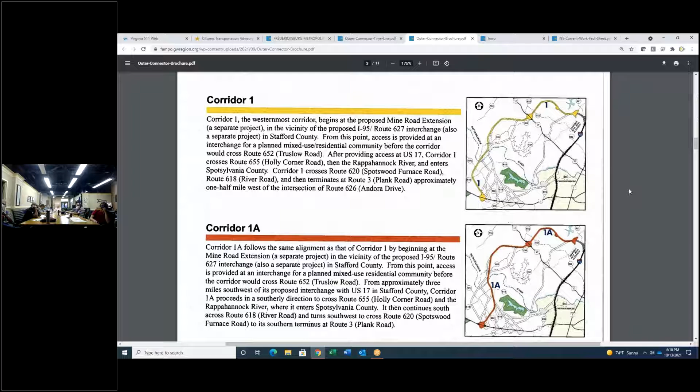Essentially, you can see the typical section would be a 4-lane divided road with a raised median. A number of options were looked at, most very simple. Corridor 1, the first corridor we looked at—you see the Centerport interchange. This location here is Holly Corner Road, so we could cross Route 17 in Stafford somewhere near Holly Corner, come down across the Rappahannock River, swing out near the Battlefield Park, and tie in on Route 3 west of Lick Run. So that was number one.

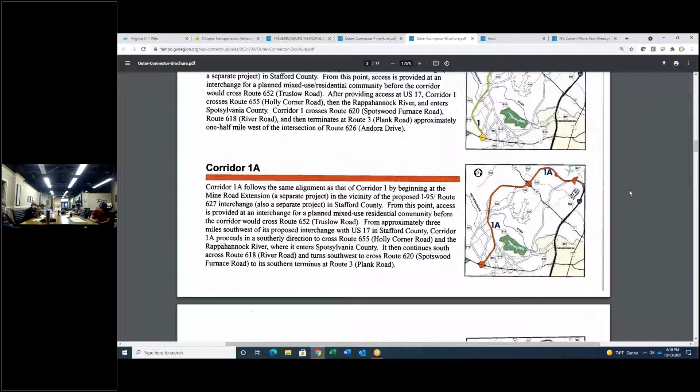You can see number 1A was exactly the same up to here, with a variation down in the Spotsylvania County area. It was mostly to move further away from the park. As you roll on through the next one, you'll see it looks just like it—it's just a variation, 1B. It looks somewhere in between; it came back and tied in with the first one, kind of avoided. So you just kept seeing more and more alternatives introduced in this area.

You can see it looks like an octopus here. And then the same thing here, although this one actually took a little diversion up in Stafford and went south to Holly Corners to the north. But most of these were a combination of beginning at Stafford, crossing 17 west of where the Walmart is now, and tying in somewhere on Route 3 west of Andora Drive. And so on we go.

Something different, right? Corridor 3 was much closer in, and there's been some scuttlebutt around about this particular option or variation of it here recently, I've heard. This one, rather than going out to Berea, would have tied in somewhere in the neighborhood of where Celebrate Virginia Parkway starts now.

There was no Celebrate Virginia Parkway when we were talking about this, right? It hadn't been built yet. It would have crossed somewhere in that area, then come down across the Rappahannock, just east of Mott's Reservoir, avoiding the Rocky Pen Run Reservoir, which hadn't been built yet either, to the east instead of the west. You can see that's this area and this area. It would tie back in somewhere west of Harrison Road.

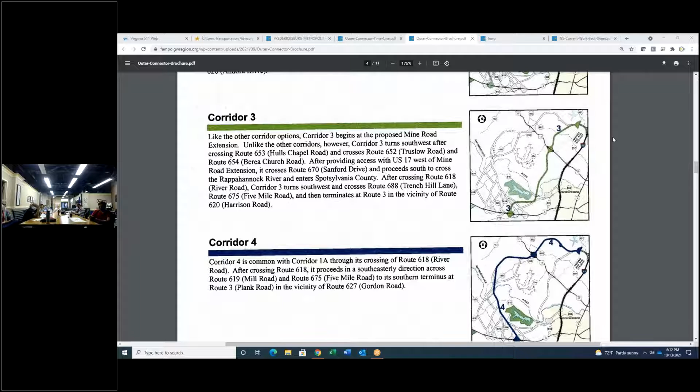So that one was a true alternative to the other, not just some variation. Then you have Corridor 4. We're back up doing the same thing again, but because Corridor 4 meant a whole different set here, we said, okay, here's our baseline now, Corridor 4 rather than Corridor 1. But again, very similar to Corridor 1.

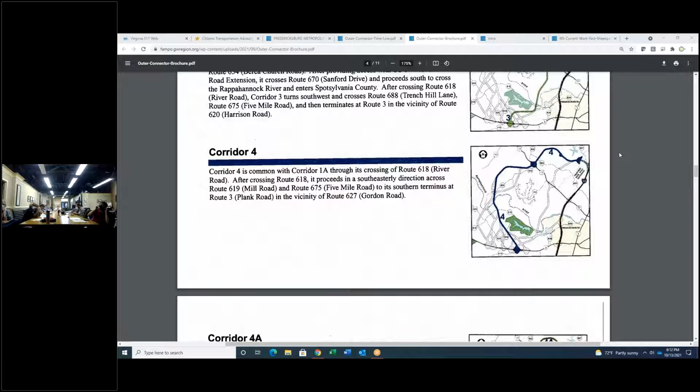4A, more the same, right? 4B, well, it doesn't look all that different, but you can see there's so much debate about things. There's your residential areas. Again, you have the Battlefield Park. You had the logic of where you wanted to tie in Route 3 to get the most use, and so forth.

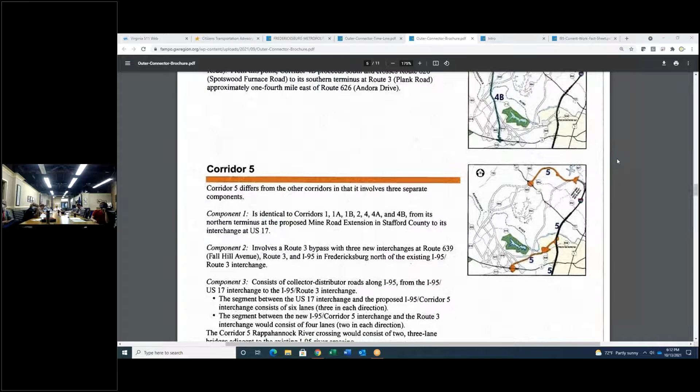Then we finally get to Corridor 5. This is a statement I made earlier about how we just saw part of the Outer Connector open because of this. This one had three components. It had this segment up here that picked up its Center interchange and went over to the Berea area on 17. And that was it. Basically, this was your 17 bypass.

That became something else further along, we'll talk about in a few minutes. But the third component, not so obvious here, was just improvements along 95, a collector distributor system. You can see that's what we built out here just recently on the southbound river crossing, and in the next two years we'll see the same thing on the northbound side. That's the section.

Essentially what we're seeing built out there is a portion of Outer Connector Corridor 5 right now. And of course the idea with this was for anyone who simply objected to a new location. There's a lot of reasons to object to new locations, right, Mr. Paul? Sometimes you don't want to build a road. Maybe it's a better idea to keep things in that same corridor rather than push them out into a whole new virgin area and destroying whatever things highways destroy, right?

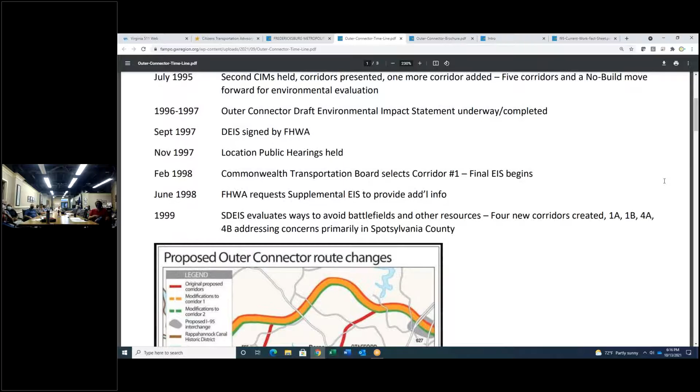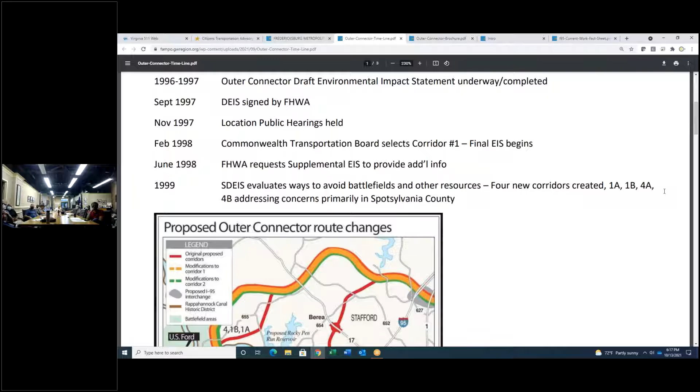But anyway, we got down into this section right here - let me look at these a little bit more. Commonwealth Transportation Board selected a corridor, four new corridors were created, and so on. This is what I already described to you a little earlier.

Okay, here we go. We selected 1B - it's back and forth all over the place, but eventually we got into the localities and where they stood on it. Stafford Board of Supervisors favored the outer connector.

Spotsylvania voted unanimously to remove this. Now, Fredericksburg voted unanimously to oppose the connector, but they had done that all along, because at that time basically Fredericksburg didn't really want to see people driving outside the city - they wanted to make sure they stayed here because there's stuff you need to do in Fredericksburg. So they were never really in favor of it.

But as you know, at FAMPO, if you have Spotsylvania and Stafford - but now it's different, you've got Spotsylvania saying, okay, we're not interested anymore. What happened there? I'll leave that to you and your friends at Spotsylvania to debate. I'm not going to touch on the politics of it, but they lost their project - the outer connector fell off.

So a number of years later, we can wheel down and see that the George Washington Toll Road Authority came about. The George Washington Toll Road Authority was actually something that the General Assembly of Virginia had to approve, and it created this George Washington Toll Road Authority to create this potential section.

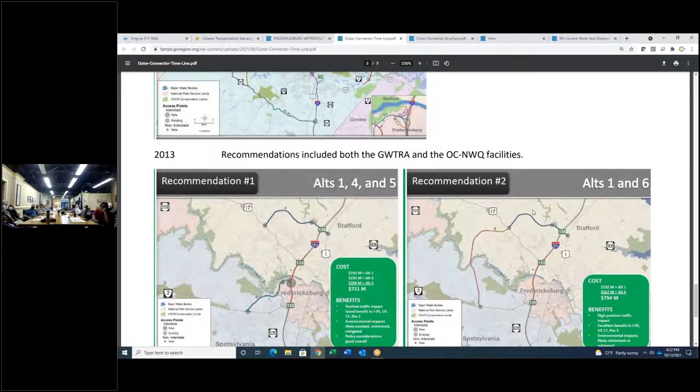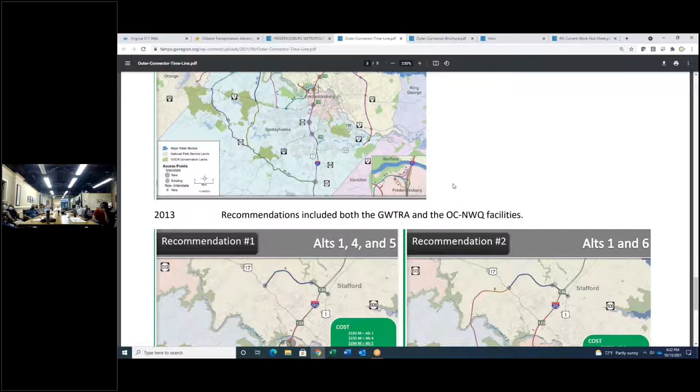You can see here, there's a little tiny window here that shows some of what we were looking at, again, with an interchange in the area, the rest area, and Central Park, Celebrate Virginia South, that would also be a part.

Well, the ones that were ultimately selected, and most beneficial, having the highest benefit cost ratio, were not unsurprisingly this section, the bypass 17, this section that bypassed Route 3, and the crossing of the river, which was alternative out of the outer connector originally, or as a second recommendation, the outer connector northwest quadrant, which was again one of the earlier versions we looked at.

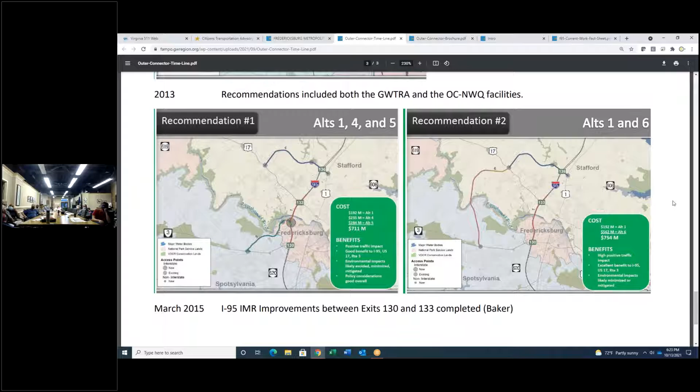And we showed the cost. They're similar, you're looking at basically $750 million. And you can see what the benefits were. And here, because of the two that were determined to have the most benefit based on everything we looked at, and again, in addition to these new ideas, the least amount of miles to do the most benefit. So that was pretty much the last thing that was discussed.

So where do we stand today? We're seeing something built that was a part of it. So it's not like we haven't taken some of this guidance and put it out on the ground. And we're going to continue to do that as we see the northbound river crossings constructed as well.

What is next? That's going to be up to you guys and folks in the various localities, citizens. VDOT, our role used to be to push these things along. Now we tend to be pushed along just because policies have changed. For example, Smart Scale. The money that goes into construction now is applied for by the localities and the various entities that are qualified applicants for Smart Scale.

If you guys come up with that idea, we'll help you along. We'll advise you, say this will work, or here's what it might cost. But it's a good thing to have that information coming from the users and localities and the people's voice. So that's where we are now. So we take a little more of a back seat in these things than we used to do.

So I stand here to answer any questions you might have regarding river crossings. Pretty much told y'all I can tell you about.

Yes, sir. I guess the first question is, for crossing the Rappahannock, is there a federal component required for approval, or is that strictly state?

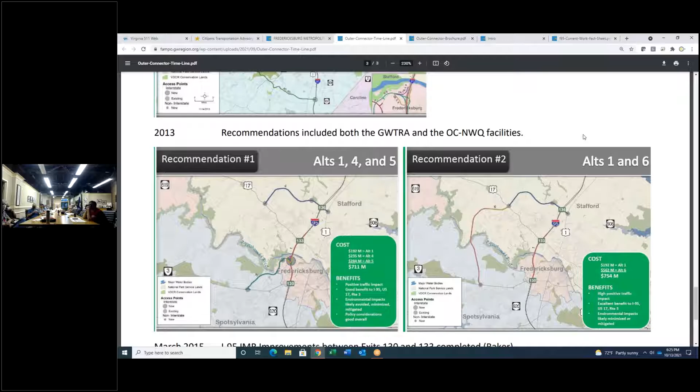Well, when we saw the outer connector, we actually got into the environmental assessment on basically what this alignment is here. That was approved, and we sunk quite a bit of money into the environmental assessment before it was rejected by the localities. So this one had approval at that time. Now, obviously, it's two decades ago. We have to go back and look at it again.

As far as this one, it would be this, because we had the George Washington Toll Road Authority, which was approved through the General Assembly. And so those two were at some point approved by the CTB. Yes, sir. Okay, thank you.

So I got a couple questions.

Every alternative that we saw throughout the last 30 years has all been limited access, controlled access, exits on, exits off. Was there anything with at-grade intersections, or was that just deemed impractical? Some of these were not defined at that level when we were studying. Certainly anything that followed along 95 CD lanes, et cetera, would fall into that limit. Most of the assumptions about connected were that it would be limited access or controlled access. In most cases, we want to have separated grades regardless, just for the efficiency of it.

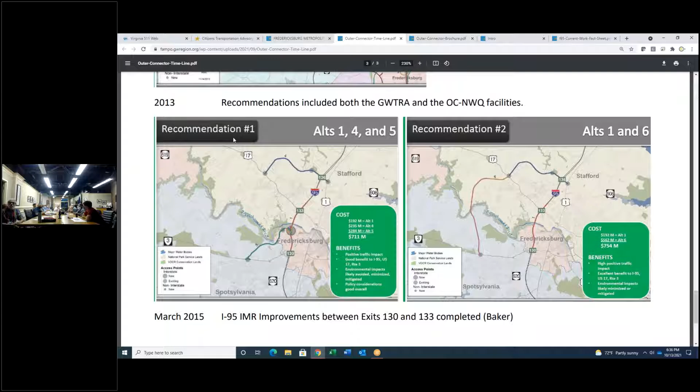Could we go back to the map that shows all the options? I think that will do.

I was here during these discussions when all this happened the first time, and there was one bit Stephen didn't mention: the difference in congestion relief of different priorities. Corridor 5, these two pieces here, got the most congestion relief of all the options. Corridor 3 gave the most congestion relief for the buck. Corridor 1 gave the least congestion relief. But Corridor 1 was the favorite of the home building lobby, and that lobby has made a lot of contributions in Richmond. So lo and behold, Corridor 1 was the choice.

From a planning point of view, as a planner and not a politician or a home builder, and as an outsider with no vested interest, those two options that are furthest west make the least sense to me because they serve the least people. They spur urban sprawl, and the red one isn't even inside FAMPO—it's not even in our jurisdiction.

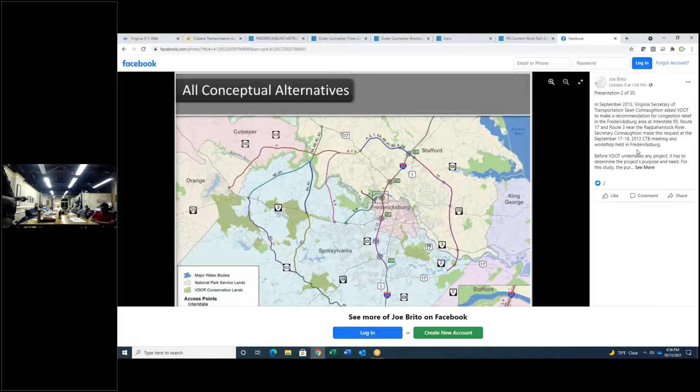Now the study did have a river crossing right here, a 1.6 mile river crossing. Can you go to the next page? So basically the 1.6 mile river crossing was Alternative 3, and the estimated cost was 104 million.

And the thing about it is where it's at, there's no traffic calming measures that have to be done, no traffic control, no utilities. So it keeps the cost down considerably and they can build it a lot faster.

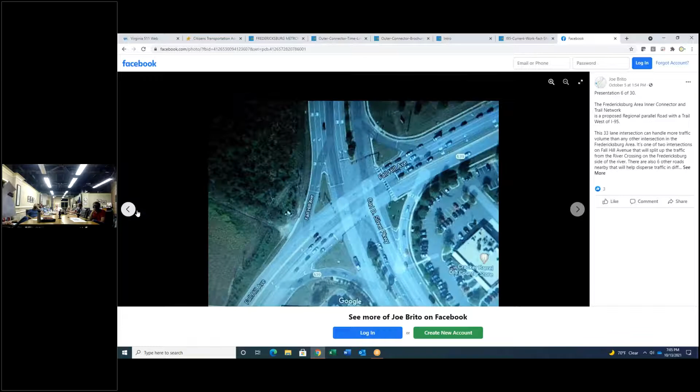Could we go back a few to the first slide? All the way back to the first. Now, if you look at corridor 3, it goes slightly west of Berea Church Road. The reason why it does that is it avoids a subdivision here and avoids about 14 houses here and a graveyard.

So I modified it. Instead of going this way, the problem was there's an industrial park here, so that was probably a big factor why they didn't even consider it back then, because it went through an industrial park. So I modified it to come over and hit Berea Church Road from this point, to become Berea Church Road. Celebrate Virginia Parkway wasn't built yet, but it's built pretty much in this area, and it will be used, but the river crossing would be over here on two bends of the river instead of there.

Joe, if I can ask you to hold it there, and if anybody has any questions, just in the interest of time, if there's something you'd like to ask Joe concerning what he's done.

Yeah, I have a question. This is Josh Brock. I don't know if this is part of the original study or if there's additional studies - is there any idea of what the long-term traffic impacts would be? Let's assume it does relieve congestion. I know I don't travel a lot of these roads specifically because of the congestion in the city, and so if the congestion were to be relieved, I might travel those roads again and thus more congestion. But are there any studies?

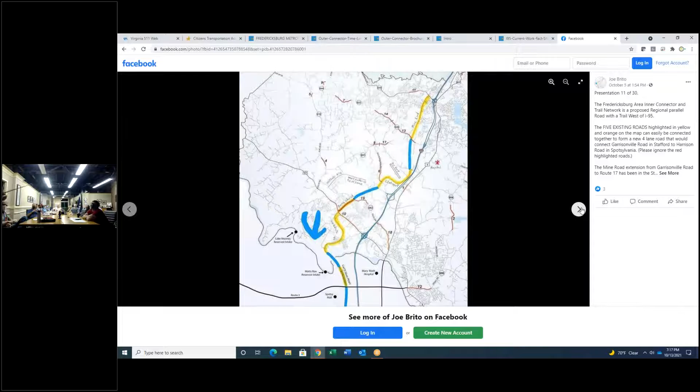The Celebrate Virginia Senior Community here at Del Webb is 3 miles closer to Mary Washington Hospital if you go over the river crossing. Not only are they 3 miles closer, but there are 11 fewer traffic lights. There are 4 911 calls a week generated in this one senior community. Up here on Berea Church Road, there are 6 calls a week at this assisted living facility. I don't know how many of those calls generate transport time, but when you can transport quicker and the ambulances get back in service quicker, it's a big plus.

Next 2 pages. Okay, now the Planning Commission also liked my idea of turning the abandoned Cannon Ridge Golf Course into a regional park. They designated the golf course as a park in the comprehensive plan, and it will come up for public hearing next Tuesday.

There's also 10 miles of 18th century roads that are in the City of Fredericksburg's conservation land. The City of Fredericksburg owns over 1,000 acres, and the golf course is 283 acres. So together it could be a regional park of over 1,300 acres, and this is a lot of usable land here.

There's already a clubhouse and parking, plus the trails. So it's instant park if we can acquire it.

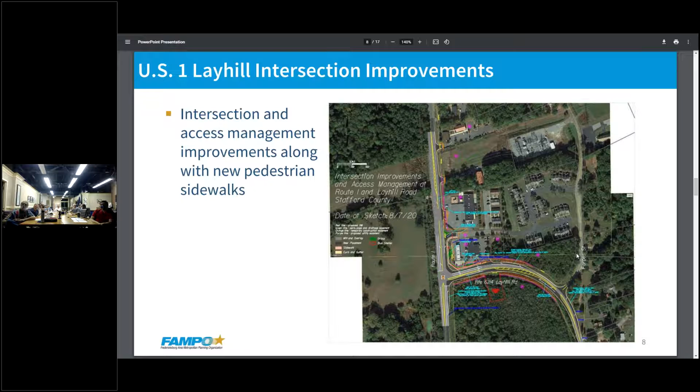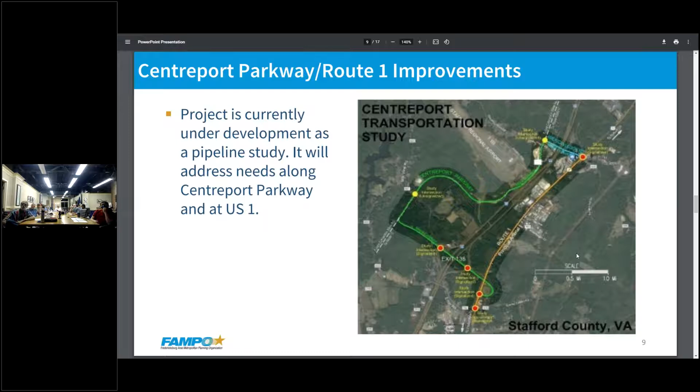This is one of the current studies that VDOT is undergoing, called a pipeline study, and it will look to address needs along Centreport Parkway and at US 1. This map on the screen shows the highlighted area, the general area where the project and study is looking at improvements. We'll see what comes out of that. We're not sure yet on what specific improvements we will see at this time.

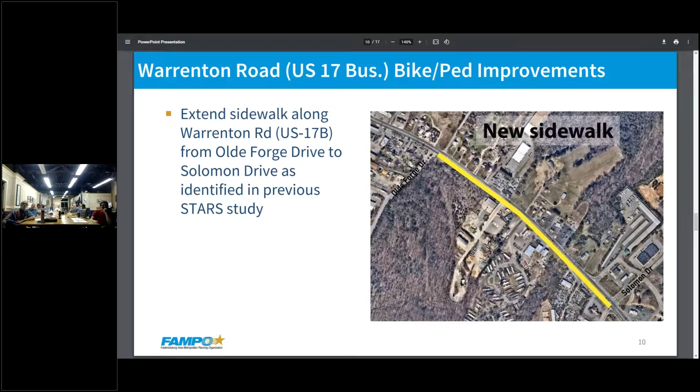It's Jane Leeds. About the Smart Scale projects — none of them relate to any areas of concern for people who are disabled. And that is part of the mission statement of the planning organizations. Safety and accessibility are probably the two largest quantitative basis for those projects, and there's nothing in the projects or anything that's been outlined for the roadways or transportation related to the disabled population. There is a significant problem with that, because I am disabled myself, I use the transit system, or have tried to use the transit system. There are significant obstacles and barriers in our infrastructure, and none of those have been addressed.

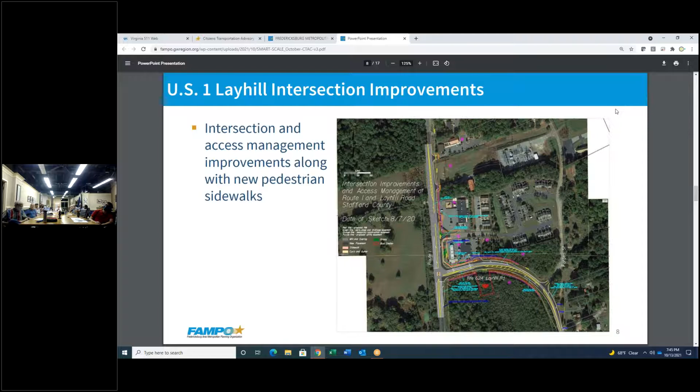Centreport Parkway, as I mentioned, this project is still under study, and we do not know of any specific improvements at this time that will come out of it. Hopefully sometime early next year, we'll have more information on Centreport Parkway.

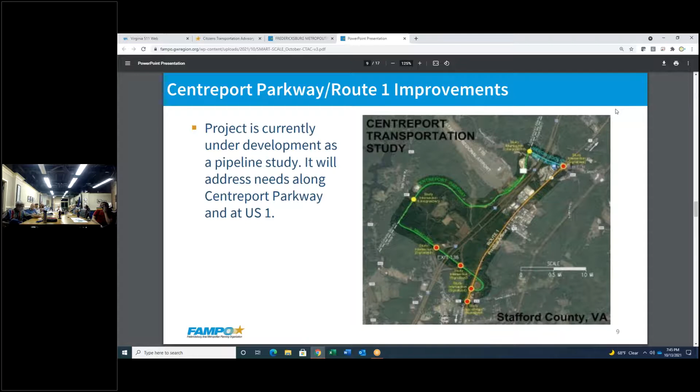Warrenton Road, US 17, bus bike ped improvements. This is a project that came out of a US 17 STARS study from I think 2017, 2018. Part of it, the sidewalk was applied for in the last round of Smart Scale, and it's being applied for again to increase the pedestrian access along US 17 Warrenton Road, an area that has no pedestrian access at this time.

So it's looking at bicycle and pedestrian improvements along this section of roadway from Olde Forge Drive to Solomon Drive. This will just be a basic sidewalk improvement. I don't believe it crosses any roadways or needs crosswalk improvements, but I'm not sure of the specifics at this time for every crossing.

Just one quick question. What I'm talking about is that we allow builders to come into our communities and not build sidewalks, or they only build them within the residence areas, but they're not contiguous to anything outside of that area. Yeah, and I think so, there's no contiguous system of sidewalk for people to go to parks or to go to schools or to go to shopping or to go anywhere.

There is, you know, we're imprisoned, and the transit system isn't accessible, even with their diversions that they allow, because they forget you. I've been abandoned by a Fred bus on a very cold February afternoon, waiting outside in frigid weather for 40 minutes. I called them and they said, oh, the bus is coming, but it's from the other direction, they'll be there in about 20 minutes. I've been out there for 40 minutes.

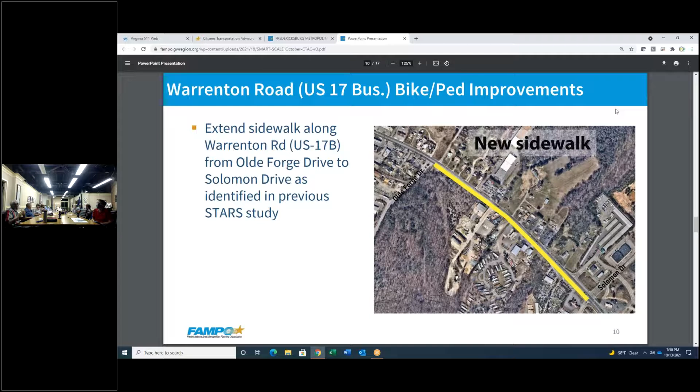Please finish your slide and then we're gonna, because I don't want to keep you here too late. I'll skim through the rest of this pretty quickly, just so you guys get an overview of the Smart Scale project.

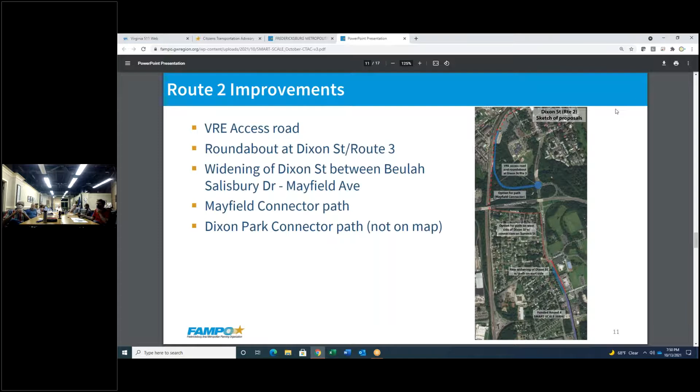The next project here is the Lafayette Boulevard roadway and bike and ped improvements. Some of you who were on the committee last round might remember the Lafayette Boulevard multimodal improvements. This is a second part to that project. We are filling in the gap on sidewalks that was left out from those projects, and we are also doing several roadway improvements that came out of the Lafayette Boulevard Highway study that Stacy mentioned was presented at the policy committee meeting.

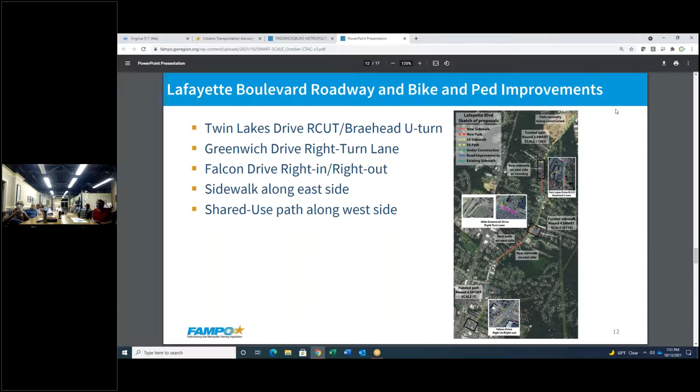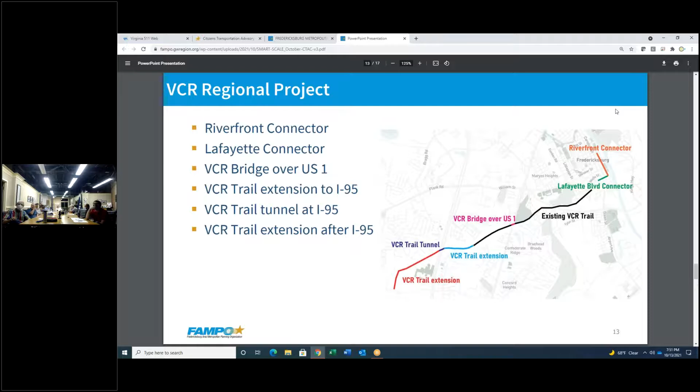The VCR regional project is basically an all-encompassing project for the VCR trail, connecting it from Harrison Road in Spotsylvania County, through a VCR trail tunnel under I-95, an extension to Idlewild, a Hazel Run bridge over US 1, a potential bridge over US 3 which is not included here, and then connecting to downtown and all the way over to the Chatham Bridge. Again, some of these are slightly outdated.

I-95 widening is one of the projects that Stephen was talking about that we are looking to do for Smart Scale. Again, as a part of this project is a supplement, including a VCR trail tunnel under I-95, rebuilding the bridge at Harrison Road, widening it, and then widening I-95 along this whole portion from 3 lanes each way to 4 lanes each way.

The Route 3 Gordon Road pipeline project—not sure of the details yet, it will come out in the next couple months and into next year. But this is along Route 3 from Gordon Road, actually now changed to Andorra Drive just past here, to I-95, looking at specific improvements along that roadway. US 1, from Lane Street to Idlewild Boulevard, the city to Spotsy, looking at improvements along this section of Route 1. And then the last project...

Pipeline study? Yeah, the pipeline study is what VDOT is calling their targeted study to look for improvements to specifically put in for Smart Scale applications. I believe they have 5 per VDOT district, and we've seen, I think, 3 of them here that are looking to do for Smart Scale applications. So it's just a small study to look at roadway, bicycle, and pedestrian improvements to fit with V-Trans needs.

So they're in progress, we don't know details yet sadly. We'll hopefully know those in the coming months as those studies wrap up in the next year.